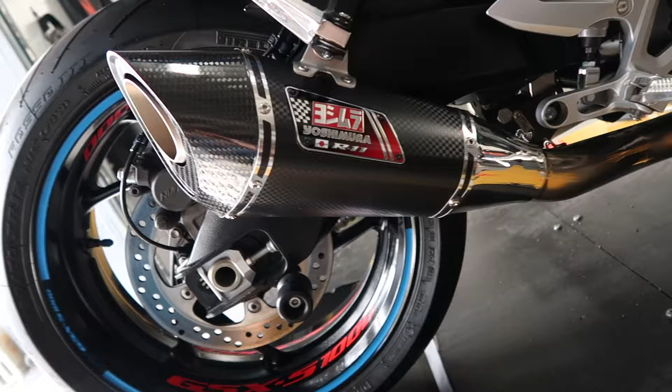Today we have a 2016 GSXS1000. For those of you who have one, comment down below and tell us what you think, because I'm not gonna lie, I'm a big fan.

This sounds ridiculous! Right now it's got a completely stock exhaust system. Actually, the whole bike is stock. He came in for an air filter install and a full Yoshi exhaust, but right now it's completely stock - stock air filter, stock exhaust, stock chain and sprocket, all stock.

So we're gonna go ahead and baseline the bike real quick. We'll get it warmed up, baseline it, get you guys some stock numbers, and then we'll do the full exhaust install like we typically do. We'll install the air filter, put it back on, re-baseline it, do the ECU flash and a full dyno tune, and go from there.

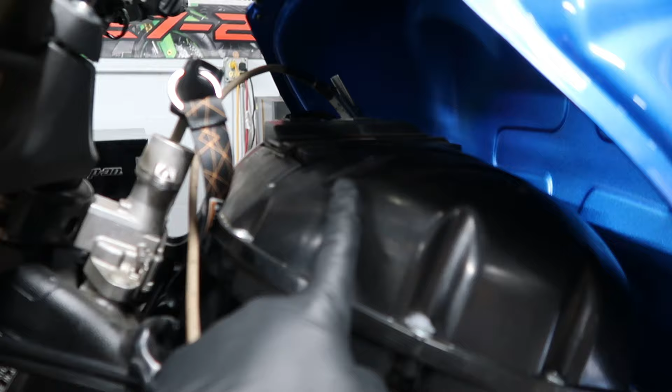Just wanted to show you, you can kind of see the tank all propped up. This is what we have to do just to get to the ECU on this bike. The ECU is located on top of the airbox here, right here.

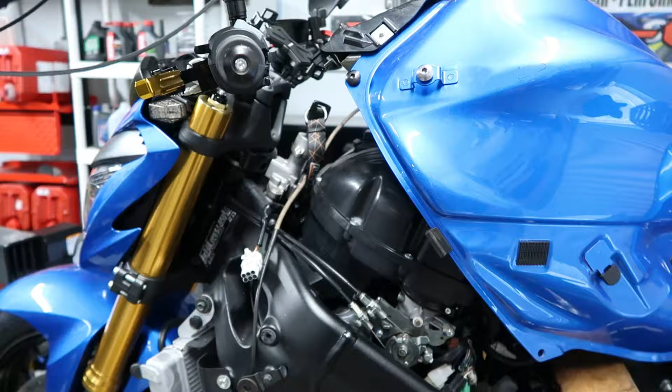But in order to get to that, you have to take off the rear seat, the front seat, there's the mid fairing right here, and another fairing that sits around in here - they're kind of like interlocking fairings. Then there's basically another piece, a cover for the ignition, and then two more bolts holding it down like a normal Gixxer, or GSX platform, Suzuki platform. Then you can finally lift the tank to get to the ECU. So it's a bit of a process just getting to this ECU.

Right now we just have it propped up so we can make sure we have a good RPM, a clean signal for you guys. So we're gonna get this thing warmed up, and we'll see what this thing lays out real quick.

Alright, here's the GSX-S, about to do an intake install. Here's the factory intake filter - it's kind of small, and look how dirty that is too. Nasty. Here's the new K&N one - oh, the size is different too, big size difference. Stock filters suck.

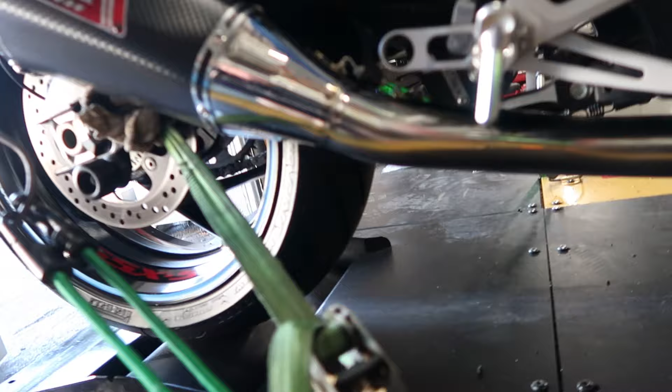So we got the GSX-S1000 on the dyno here, and we have the full Yoshi all installed. We're gonna go over it real quick. We already got it all set up here on the dyno, but we have it all installed here. Let's do a little close up, get an idea.

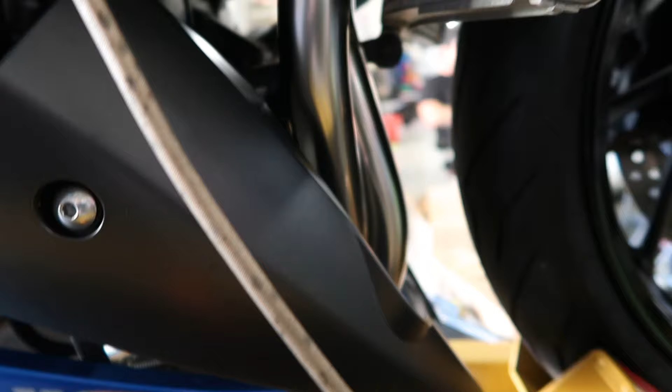Now we have not idled it, we haven't really turned it on. We turned it on a couple of times, but we haven't really burnt it in - that's why it looks all brand new, still nice and silver, nice polished look. We haven't really fired it up or cranked it over, so we're getting ready to do that now, and we're gonna get ready to do the new baseline with the new setup.

Guys, so we got the GSX-S1000 all wrapped up, and I have to admit I'm a huge fan. I went back in some of my history here, and it turned out I've only tuned like 2 of these things so far, and I don't really remember it, to be honest with you. It's been a while.

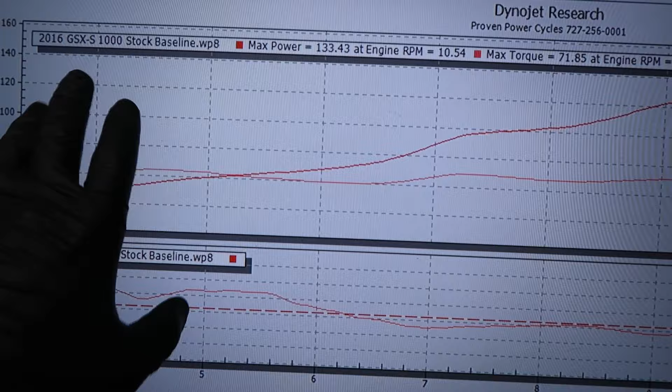But I'm pretty happy with the numbers. This bike is a ton of fun. This guy's gonna love the bike. So I'm on the dyno now, and we got the numbers all pulled up, so why don't we go through them real quick. This is 100% stock - stock exhaust, stock air filter, stock, okay? We were at 133 wheel horsepower with 71.85 foot-pounds of torque.

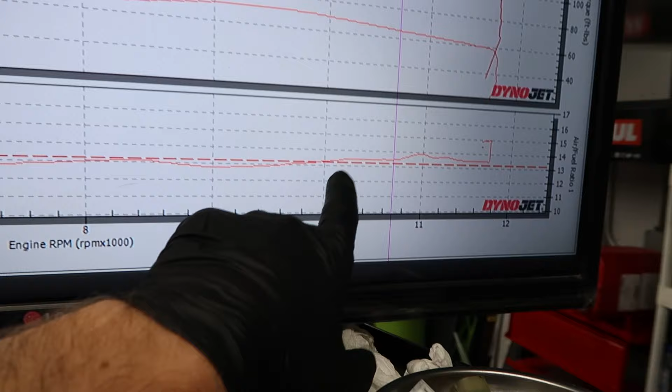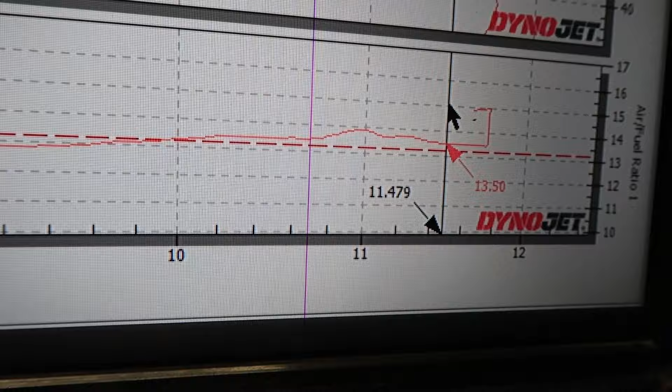Now, the air fuel actually wasn't that bad at all, considering it had a completely stock system. At the higher RPM we are a little lean here - let's see, we're at 13.50, as you can see there. Honestly, that is pretty lean for being at a high RPM. I don't really like it that lean, and that's crazy - that's actually 100% stock, 13.5 damn near redline. Again guys, we're kind of getting onto that edge of being a little too lean, but overall, not a bad air fuel for a stock system.

It's actually pretty good. And let's look at the power curve. So we have a little bit of a ramp up, a little bit of a plateau, a little bit more of a ramp, and then a full plateau. So this bike would be a fun street bike, but if you're trying to do some highway pulls or something like that, not the most fun, I'll be honest - it kind of falls off.

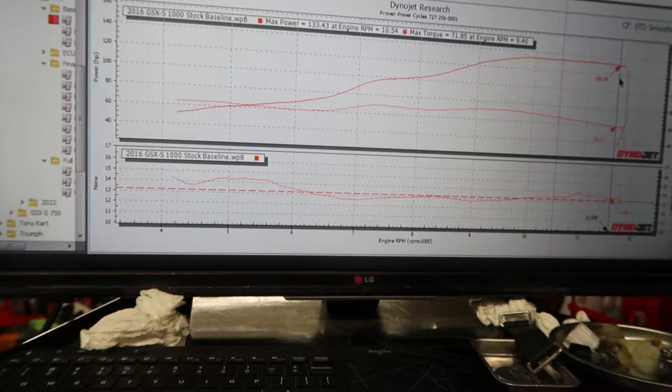If you notice here, we kind of teeter off a little bit. We're at 10,000 RPM, we go from 133 wheel horsepower at 10,000 RPM all the way down to 131. Not a crazy power loss, but you're still losing some power throughout that top end range, which is not going to be a fun pull.

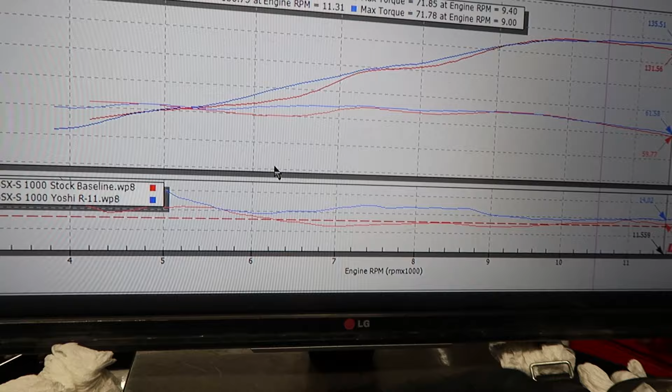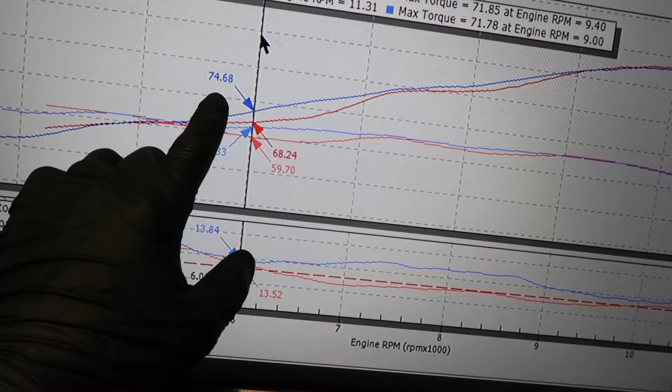So now, once we installed the exhaust and the filter and all that jazz, look at the power we actually picked up right here in the mid-range. We picked up gobs of power without doing really anything aside from installing the exhaust. We picked up a solid 6 wheel horsepower here at 6,000 RPM. That's pretty funny.

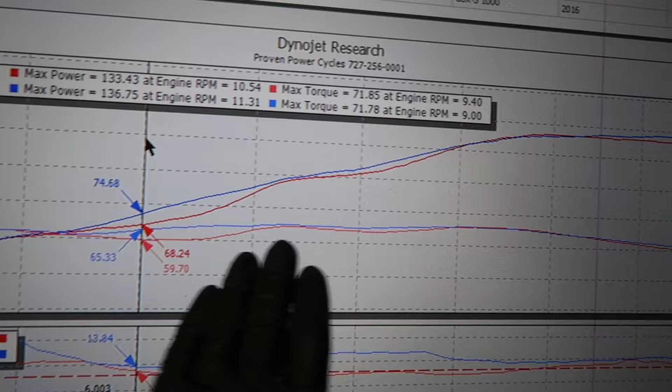And then we picked up roughly 6 foot-pounds of torque. But at peak power, we only picked up about 3 horsepower and basically the same amount of torque. So overall, the curve is better once we installed the exhaust. And if you notice way up here now, we're no longer losing that power, it's actually pulling all the way to redline now.

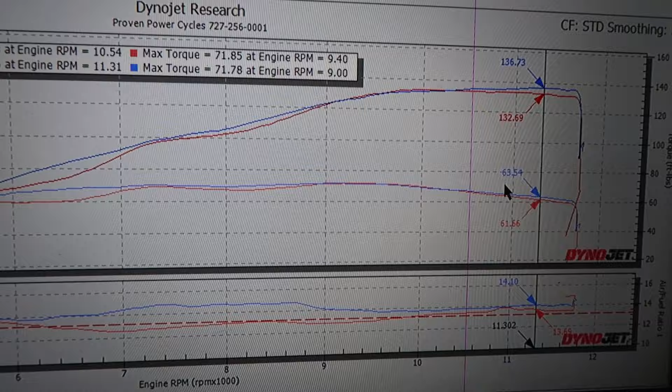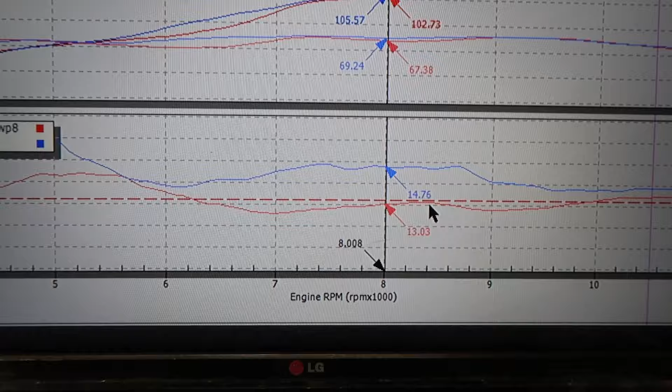Now here's the kicker though, look at the AFRs that we measured. Stupid lean AFRs, and this is kind of a typical thing we saw with some of these older bikes. That's 14.76, 14.7 range. This is a 14.88, almost a 14.90. That's very, very, very lean going through this mid-range.

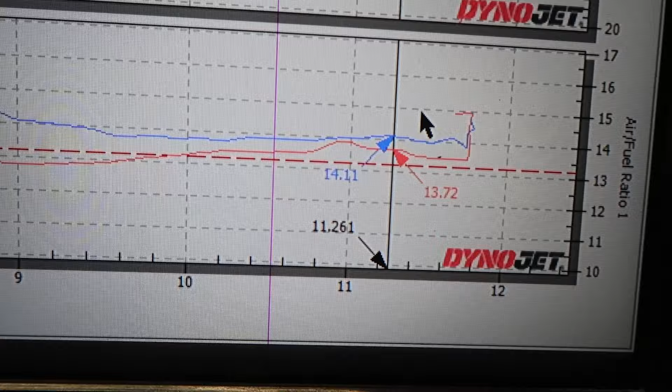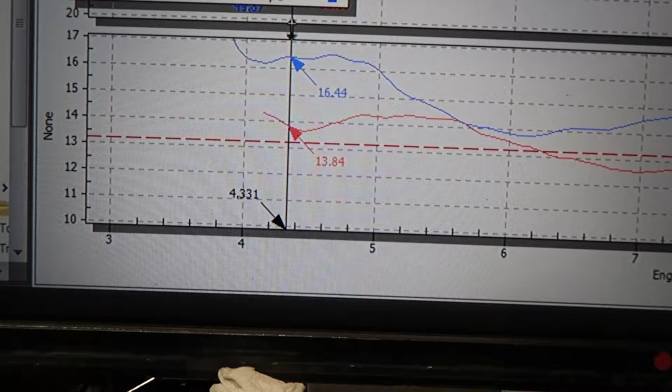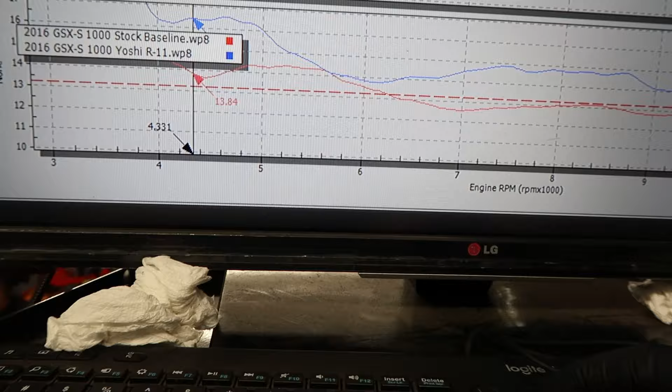So cleaning a lot of this up - yeah, look, we're at 14.1 all the way up at 11,200 RPM. That's very, very, very lean. In fact, even the stab, we were almost off the charts. Look at the stab, we're at 16 air fuel. And if you look here, you can kind of see it struggles to pull the power up, it falls off again, then it climbs again. So this is a clear indication of it being way too lean. Picked up power, but we're running lean.

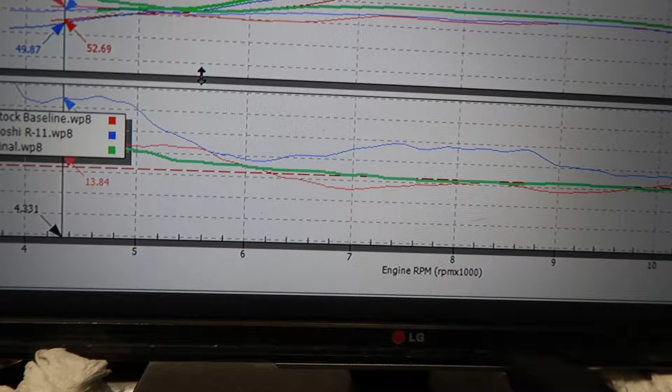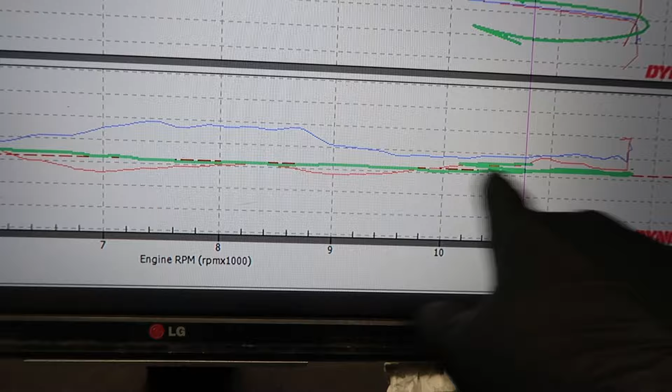And here we have the final graph. We got everything dialed in, AFR looks super clean. Has a nice progressive curve, comes in nice and clean, and we have a nice smooth AFR. Now right here we hit the rev limiter and we picked up interference, so you'll see a little bit of zigzag. But all in all, that line is damn near on that dotted line, or a little bit below it, right where we want it to be.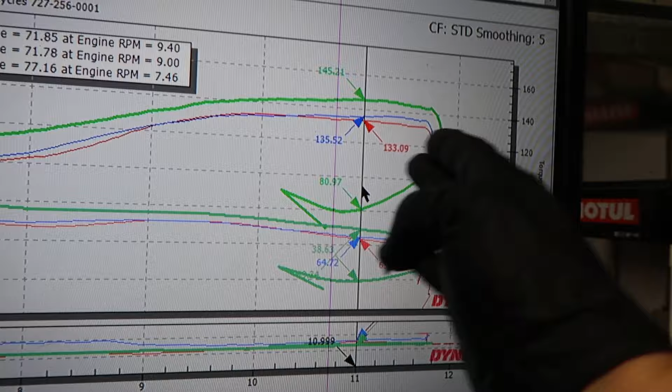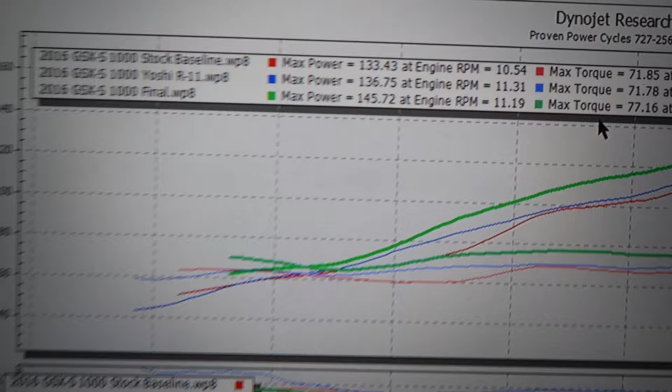At 11,000 RPM, we'll target up high here - we went from 133 to 135 to 145. So again guys, we're picking up 12 wheel horsepower up top. These are huge gains for this bike. We ended at 145 wheel horsepower with 77 foot-pounds of torque. Again, massive jumps in between everything - the horsepower, the torque. This thing was a little rocket ship.

We've been seeing quite a few of these guys drive these bikes around at the track and a few other places, and to be honest with you, I never really understood why, because I've never really driven one or messed with one. But I've gotta be honest, just feeling the power band on the dyno was incredible. It felt really good. I'm a huge fan of this platform.